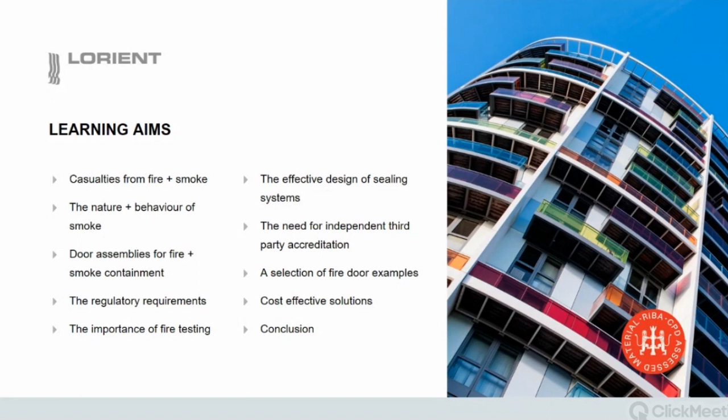So today we are going to look at the casualties from fire and smoke, the nature and behaviour of smoke, door assemblies for fire and smoke containment, the regulations, the importance of fire testing and the effective design of sealing systems, the need for independent accreditation, looking at a few fire door examples, some cost-effective solutions before reaching the right conclusion. So starting off with the statistics.

It's got to function as a normal door in everyday life, but then when a fire breaks out, it's got to be the effective barrier to prevent the spread of it. Now, we've got to be able to evacuate a building safely, and that might be horizontally or vertically. And fire and rescue have got to be able to come into the building because there may be some occupants left inside. And that fire resistance is always defined in minutes, 30, 60, 90 or 120 minutes for a timber fire door. And if we're looking at something like 4 hours, then we will be moving to a metal door.

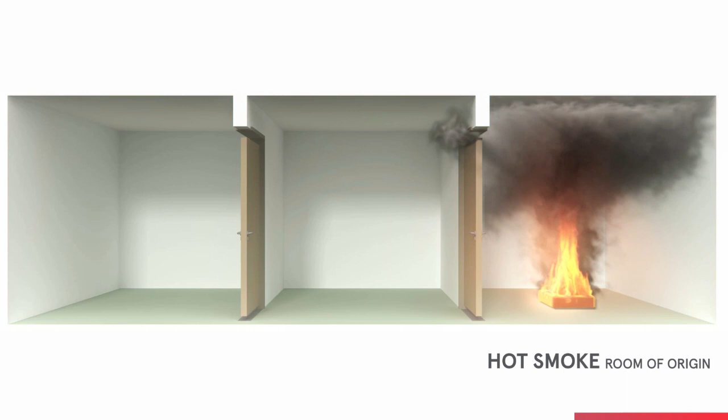And so what we want to do is limit the size and the spread of that fire to the room of origin. We do not want it travelling out of that compartment. Now, when you've got that combustion process taking place in that room of origin, the pressure is absolutely phenomenal. That smoke is going to be forced to the ceiling, and then it's going to spread sideways. It's going to travel through the head of the door and it's going to travel down a corridor. Now, generally, that smoke will always outrun the fire. As it then travels away from the seat of the fire, it will begin to lose its buoyancy and it will then drop and it will creep and it will travel through the smallest of gaps, particularly the threshold.

The smoke temperature in the room of origin is going to be 600 degrees C and the temperature in the fire compartment is going to be 25 degrees C. Now, we classify it as cold smoke, but it's highly toxic and it will burn your skin. And the reason for the statistics that we looked at earlier is because of this lethal gas called carbon monoxide. We cannot see it, smell it, or taste it. Now, we need oxygen to breathe in our normal atmosphere, and when that drops to levels as low as 14%, and we introduce just 1% of carbon monoxide, it could lead to disorientation in 20 seconds, unconscious in 60 seconds, with death then soon after.

Now, everything does depend on the size and degree of ventilation in the room that this takes place. But people think that you are going to wake up because of the irritation of smoke. However, this gas, carbon monoxide, is absorbed through your skin, taken by the blood straight to the brain. And that is why you become giddy and fall over. And it's also why the smoke knocks you out and then the fire cooks you. Now, I know that this is a very sobering thought and it's not a good message to deliver at any time of the day, but that is why we've got to talk about fire doors and their purpose.

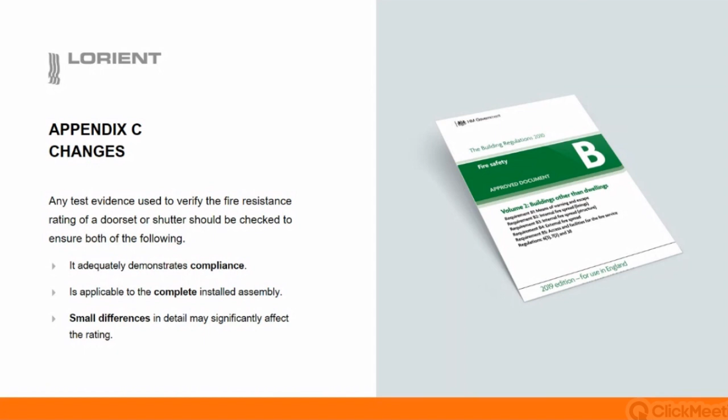It's a very complex system. Fire doors are tested and literally burnt to destruction to prove that they work. So we've got to make sure that everything is as tested. Now, Regulation 38 is the link between the approved document B and the Regulatory Reform Fire Safety Order.

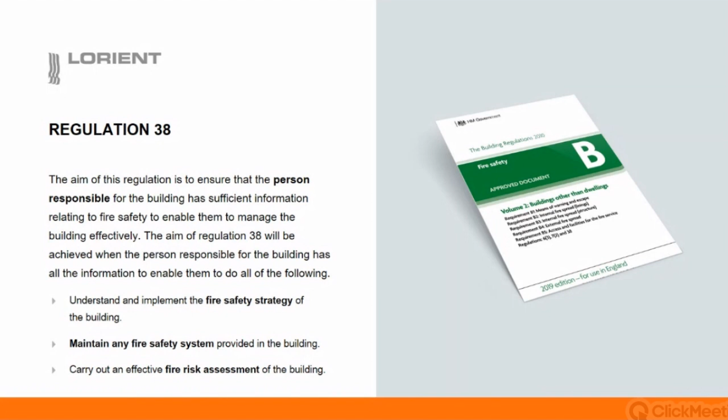And this very clearly states that the fire safety information must be given to the responsible person, either when the project is completed or when the building becomes occupied. And this is so that that person defined as the person responsible has got the information to be able to implement the fire safety strategy of that building, maintain any fire safety system in it, and carry out a fire risk assessment. I know that I'm talking about a lot of regulations, but all of these are key because we're dealing with a life-saving product.

Regulation 7 says that building work carried out with adequate proper materials must be appropriate for the circumstances in which they're used. So this is relying on the fact that somebody is going to purchase and install, if the components are being bought separately together to make the fire door, are doing it correctly, that they have the knowledge of what they're doing.

And so the Regulatory Reform Fire Safety Order actually collated, deleted and amended over 118 pieces of different legislation. Although this is dated 2005, it actually became effective in 2006. The government at the time said that the introduction would not become a consultant's charter or place an undue burden on businesses. And the Regulatory Reform Fire Safety Order applies to any workplace, common areas within apartment blocks, but does not affect domestic premises. So it does not affect our domestic house, but it affects all different kinds of public buildings outside our domestic house. So even, for example, places that you might not consider, like a church.

And so moving on directly to the Regulatory Reform Fire Safety Order, it demands that fire precautions are put in place that are reasonable and practicable, and they are to protect relevant persons. And so relevant persons, they could be the people that work within the building, they could be the visitors. It affects everybody that comes into that building.

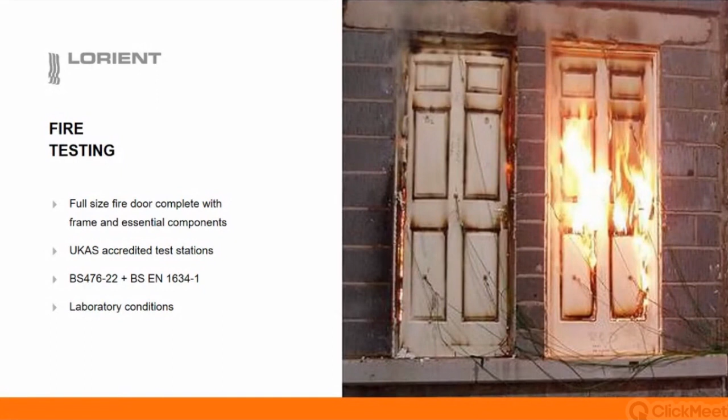Now I'm going to show you how quickly things can go wrong if somebody forgets to give their door and vision panel some intumescent seals. This is a very short video.

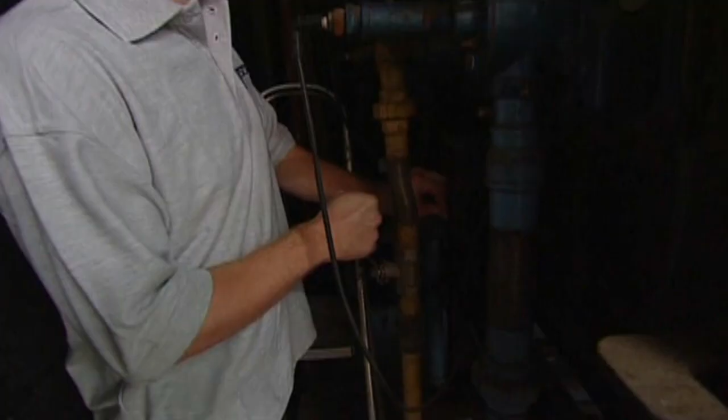We're going to show you a test sequence made by BBC South West for Inside Out after the tragic hotel fire at Penhallow in Cornwall. Samantha Smith is the presenter. This test shows how getting fire safety wrong can be catastrophic. The door on the right is correctly fitted with flame and smoke seals around the frame and window. The one on the left, identical in every other way, has no seals. A fire door should hold back a blaze for half an hour. Alan, must be about 13 minutes in now. The door on the right is intact. The door on the left is starting to burn through. Yes, what you have to remember is that these are both fire doors. Only the door on the right has fire seals and smoke seals. Look, it's actually going now. Look at that. And that's a new door. Many of the ones that we've looked at in hotels are old doors. They don't fit very well. They're damaged. They've not been maintained. And if a new door will fail in 15 minutes, an old door will probably go a lot quicker than that. So if we were in a hotel right now, the fire would have breached through that door, be travelling along the next corridor into the next compartment of the hotel. If the right-hand door was fitted, we'd be safe. Yes, you would be, yes. That's a graphic example of the value of properly specified and fitted fire doors. It was 25 minutes after the first door failed that the sealed door finally gave way.

And that is what the fire door manufacturers and the component manufacturers want. Safety is defined in minutes, and nobody just wants to get over the line of 30 minutes, 10 seconds. Everybody wants extra minutes. Safety is defined always in minutes when we're dealing with fire doors. Now, I would like to just very quickly show you the locations of intumescent seals, because this is the material, as you saw from my short video just now, that makes the fire door work.

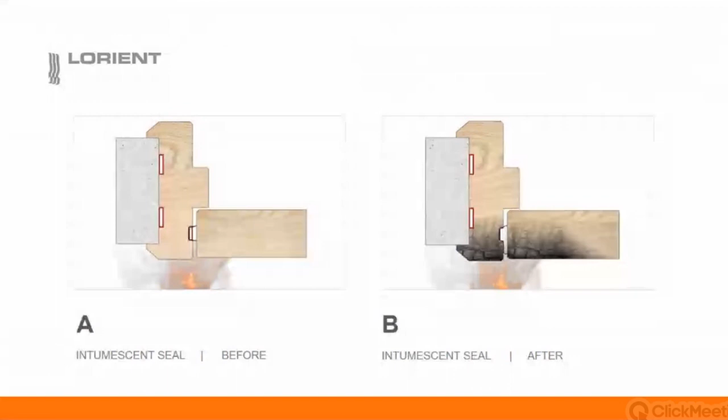Now, I'm showing it in the image A with fins, and whether that's a fin or a brush, that then means that we've got cold smoke protection, and that fin or that brush must touch the opposing leaf. So if it's positioned as it's seen here in the frame, that fin or brush has got to touch the door edge. And equally, if it's in the leaf, it has got to touch the edge of the door frame. And the tolerances of this are very fine. The tested gap for a fire door on the two long edges and the head of the door is 2 to 4 mil.

And when we're dealing with a combined fire and smoke seal, and we know that smoke is the killer, that gap is 3 mil, and we're given a 1 mil tolerance, so it becomes 3 to 4 mil to allow that door to open and close. Because we've got to remember friction. We've got to remember that people have to get through these doors.

But intumescent seals, which sometimes get called intermittent, but I promise you they're intumescent, are seals which contain different materials. The material that you can see here on the screen, the white material, is called sodium silicate. It's a chemical formula and it expands every single time at 120 degrees C. But the material that's most common is what we call graphite. It's a grey material and it's got a different formulation from different manufacturers, and that can expand at anything from 170 to 300 degrees C.

And what we cannot do in the perimeter of the fire door is mix and match sodium silicate with graphite seals. Now they can go in different locations, but on the two long edges and the head of the door or on the meeting stiles of pairs, we cannot mix and match the materials or the brand. And the reason for that is that if it's mixed and matched, the first thing that happens is you invalidate the test evidence of the fire door manufacturer. Now, he may have test evidence with both materials, but they were never mixed in the perimeter of the fire door when it went into the furnace and undertook the fire test.

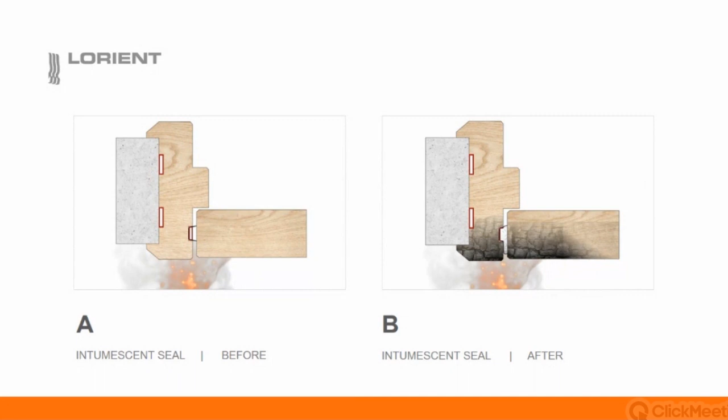And as I say, the size and location of those seals is always determined by the test evidence of the door manufacturer. And when the door manufacturers go to test, they test their doors as singles and pairs, single acting, double acting. And what we cannot do is ever make two single leaves into a double leaf. If we want a pair of doors, whether they're single swing or double swing, they have got to have been tested as a pair.

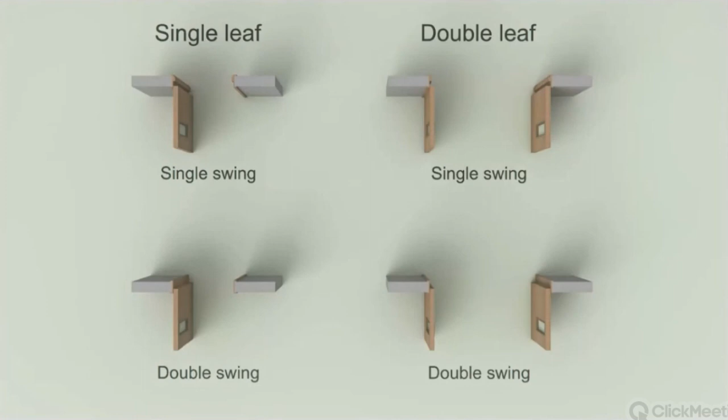We cannot simply, if we're not taking in a door set, go to a door store, whether that's builders merchants and places in the country. I shouldn't name anybody. But what we can't do is go out and buy off the shelf and make two singles into a pair of doors. Well, all doors are hard to get through, but pairs of doors are really, really difficult. So many things can happen.

And so how do we actually recognise a fire door? Well, the third-party accredited schemes that I'm going to show you now have been around for about 25 years now. You may have doors in buildings that are older than this that may or may not have any markings, but this is the common way to mark and identify fire doors now. If the doors have come through the BM Trada scheme, then they will have a plug. Now, these plugs are quite small, the end of a pencil. They tend to get positioned in a fire door on the hinge side of the door, generally between the middle and top hinge, so they are visible when the door is open.

They're coloured plugs with inner coloured fir trees, and across those fir trees, you will find a Q number. That Q number identifies the original manufacturer of that door or door set. The inner colour fir tree determines how that door left that door manufacturer.

The alternative way, or a very common way of recognising fire doors, are doors that have come through the BWF Certifire scheme. Now, they have a label that sits on the head of the door, and it very clearly tells us that it's an FD30 or 60, for example. It could be a 90 or 120 minutes, by the way. It has a Certifire number. So the CF996 that you can see on the screen is the individual test evidence applicable to that particular, for example, FD30. It clearly tells you who the door manufacturer is and how you can contact them.

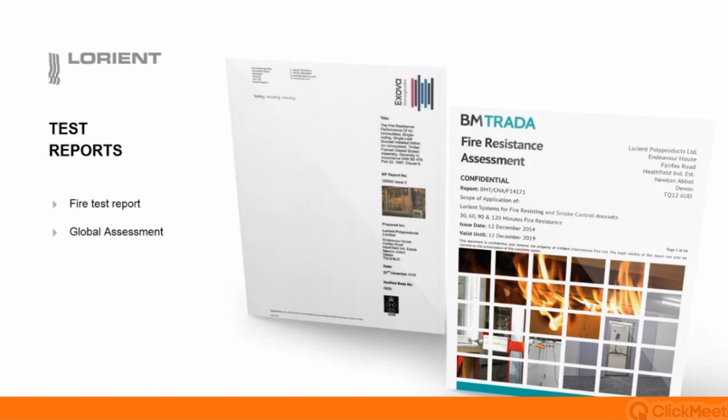And so you may have a test report that you're referring to, or you may have a global assessment, or you might have a Certifire certificate, but the detail will be in the paperwork trail. And if we go back to the beginning, ADB says that this kind of information must be handed over to ensure that the responsible person can carry out that risk assessment. It's also essential for anybody installing the door, inspecting the door, and critically maintaining it.

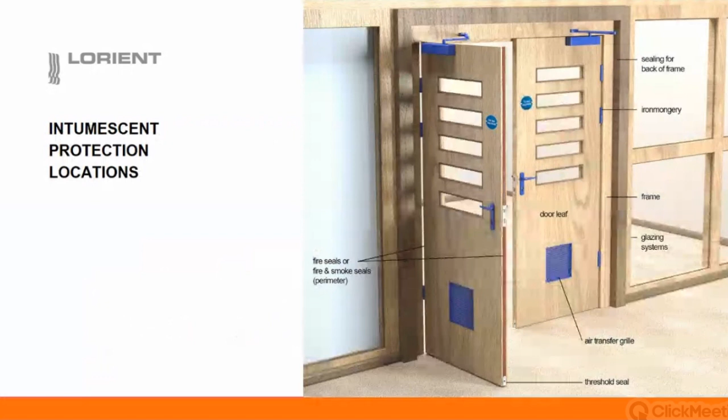Now, before I move on and show you some examples of issues at fire doors, I'd just like to point out the areas that we might be inspecting and maintaining. And so what we have here is an example of a pair of doors. They're single acting and we've got a screen. And so what we're looking at came in as a door set. Then the elements I'm going to tell you about should be fitted. If we're dealing with an assembly that has come into a building, then you just need to be mindful that these are the things that you should be looking for.

And so dealing, for example, with vision panels and air transfer grills, those holes should only ever be put into a fire door either by the original door manufacturer or what we call a licensed converter. And that is somebody that's been trained by the door manufacturer to put in correctly and consistently the holes or the apertures for these products. And with a glazing system for an aperture, again, that has to be done by those two people. But when we're dealing with that air transfer grill, the hole can be cut by the licensed converter or the door manufacturer. But the air transfer grill that's sitting at the bottom of that door, the square block, can actually be fitted by a contractor on site.

When we're dealing now with ironmongery, hinges, concealed door closers, or locks or latches, because we've got two fire tests running parallel at the moment in the UK, 476 or 1634, those pieces of essential ironmongery might need additional intumescent protection. And so, for example, with the hinges, it might be that we need a material called monoammonium phosphate. It's a white material and it's a sheet material, and it will sit underneath each hinge blade. So that means it will be 1 mil of timber that needs to be taken out of either the leaf or the frame if we're reinstalling. This material doesn't expand, it actually insulates, and it therefore will not pop the size 8 screws out of the hinge blades. It simply makes sure that when the fire is attacking that door, it doesn't cause that door to fail or drop.

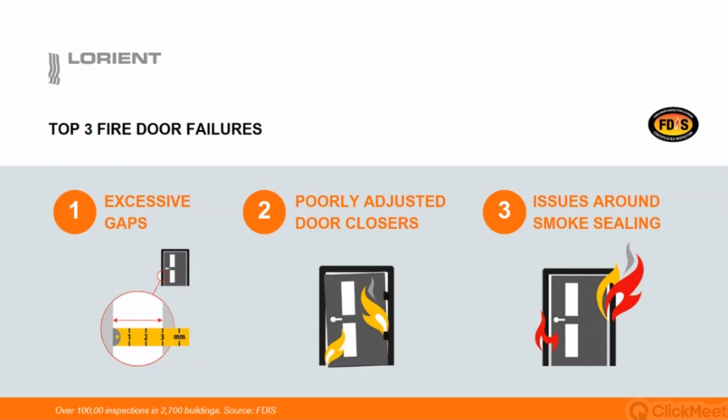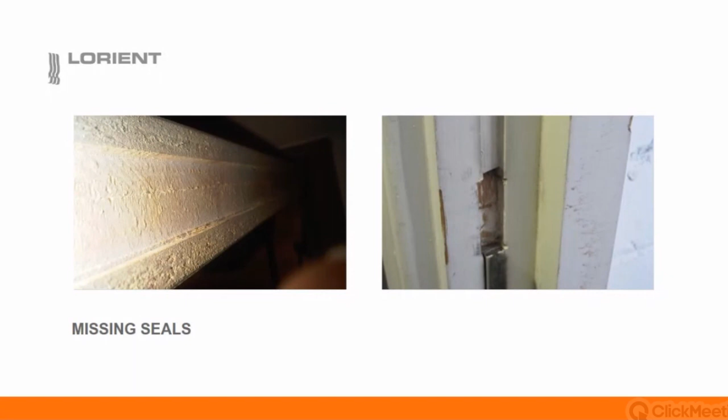And the seal, we need to peel out, check whose brand it is, and make sure that we put the right seal back. If we peeled that seal out and we didn't know who the manufacturer was, then we've got to take the entire perimeter of the seal out on the rest of the frame and the head and put a brand new one back in. And that again is where third-party accredited products work best.

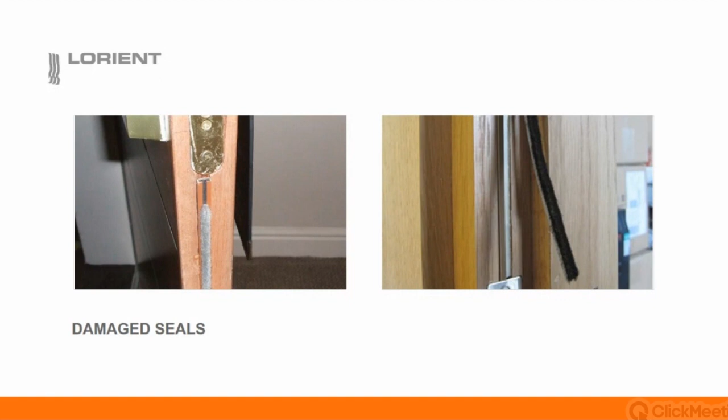Here we've got damaged seals. And so what we need to do here is peel them out and do exactly the same thing. If we cannot see the brand, we've got no test evidence to refer to, then we've got to choose another third-party accredited combined fire and smoke seal. And the seals, from a fire and smoke point of view, they could have fins, they could have brushes. Fins are kinder to allow the door to shut, but a brush is an excellent combined fire and smoke seal.

Here we have got a grey combined fire and smoke seal brush that has been painted. And I need to highlight the fact that if you have got a painted brush or a painted fin, that will not give you the combined fire and smoke performance, but it's the smoke performance that's negated. The intumescent seal will still work, and so we have a choice here. We could leave that seal there and give it an independent, third-party accredited smoke seal. However, it may be better to peel that seal out and replace it, but you have to be mindful when you do that, you've got to make sure that the intumescent seal fits completely flush into that old-fashioned slot.

And a solution for an independent third-party accredited smoke seal could be something like Batwing. Batwing sits in the corner of the door stop, as you can see in the image on the right. The door only comes into contact when it's in the shut position, and it gives you smoke and sound protection. However, there is no fire capability. And so that is why when that is fitted in a door that has no existing intumescent seal, it will always need a separate fire seal for that designed capability.

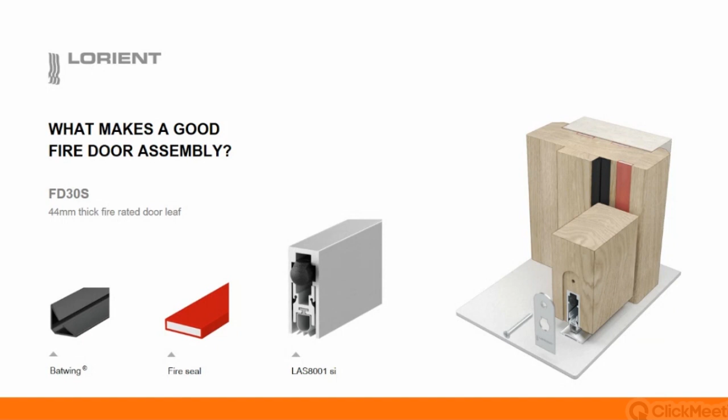I also need to reference a plain fire seal. If a plain fire seal is painted, the intumescent seal will still work, but please don't paint over them when they are brand new.

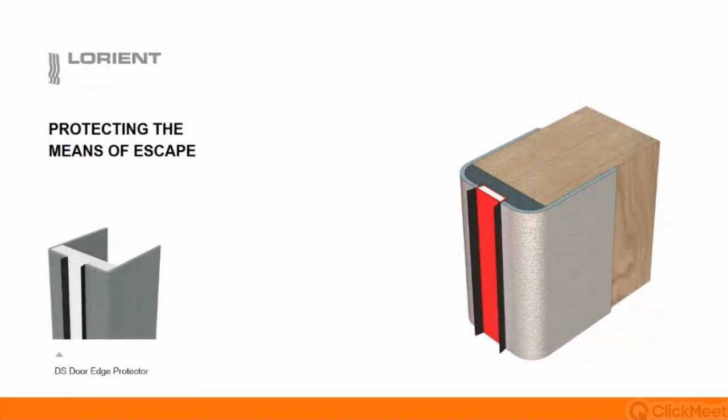This is fitted on the door edge, and the fixing is actually disguised underneath the intumescent seal. When it's fixed to the door, it comes in 44mm or 54mm thick width, and it comes in different lengths, so it'll suit alternative heights than a standard leaf. However, when that intumescent seal is then fitted, it disguises the fixings.

Now, glazing, we've already touched on the fact that glazing should only be done by licensed converters and the original door manufacturer. However, if somebody puts their fist through a vision panel and we need to make an emergency repair, then obviously we have to do that because we may have sleeping people in those buildings. If you're going to carry out this kind of repair, please make sure that you actually have that door back in situ before you leave.

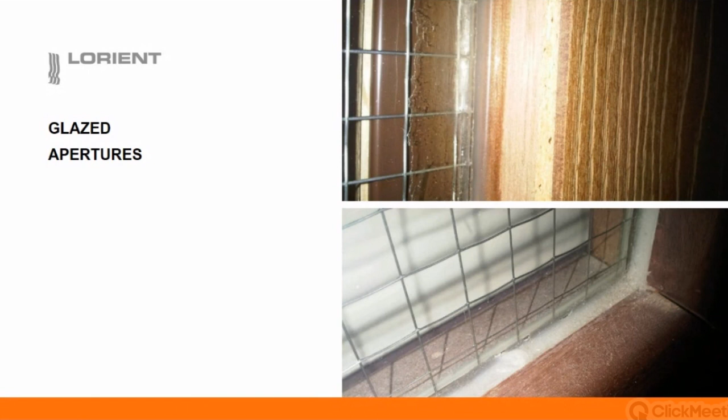So you can see in the top image that the Georgian wire glass was replaced and it's been put in. It looks like it's got some kind of silicone sealant to actually hold the glass into place. Now that is not a tested solution, and the bead detail hasn't been put back. So that really is a very, very bad repair. And we've got something similar going on in the image at the bottom.

Now, here are two possible choices. And again, we're constantly having to refer back to test evidence, but two different glazing systems here. The one on the left is a graphite, and this is a 2-seal system. So we've got Georgian wire glass, and we need then the seal either side of it. We've got to obviously make sure then that when this repair is being done, the correct glazing system is used, the correct bead detail is used, and the correct fixings are used.

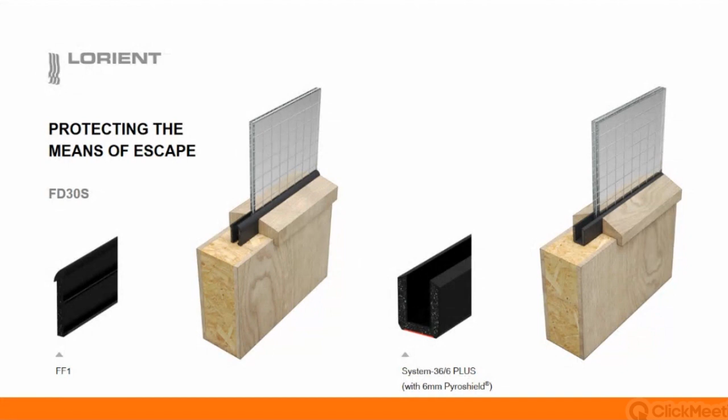There is absolutely no point going out and getting the glass and the seal if the tested detail of that bead is not followed. So please make sure that you follow the test evidence of the seal manufacturer. The one on the right, as you can see, is also a graphite material, but this is actually a channel. But again, the test detail is, how does that bead get fixed? What is the size and the degree of the chamfer? Please make sure that you follow the test evidence.

Other reasons for potentially having holes in doors might be something like a letter plate. Two different letter plates here. They were actually flat entrance doors, and under the RRO, somebody recognised that they were not a fire and smoke solution in that fire door, so they were not going to protect the occupants if there was a fire or anybody fleeing down the corridor to escape a fire.

And having heard that graphite works, you can see that with the top aperture, somebody went out and bought some graphite and lined it. Now that is not a tested solution. In the event of a fire, the flap that's being held up is going to melt, and that graphite will not swell enough to fill that hole. It is not a tested solution.

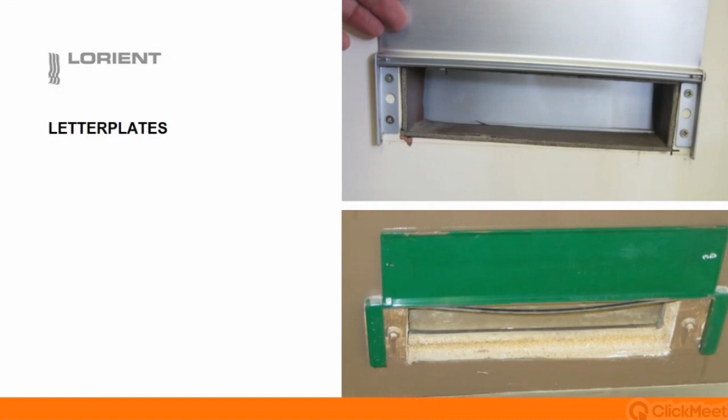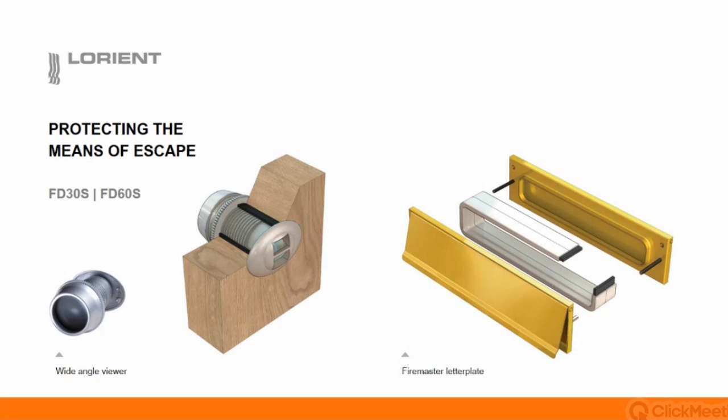And so a tested solution could be, for example, the letter plate here that is shown on the right. Because I'm not in front of you, I can't actually show you this, but it's actually a telescopic plate, and that white element is the graphite wrap. And what happens in the event of a fire, that graphite wrap completely crushes the PVC sleeve that goes in between the two elements. And so in the event of a fire, you will have a flat and a safe compartment and the safe means of escape.

I don't know what it was or whose it was. They took the cover grill off, took the block out, and then forgot to go back and replace it. And so again, that will simply not work.

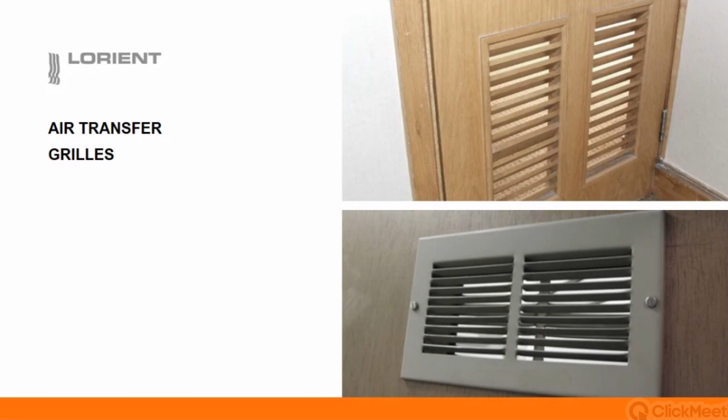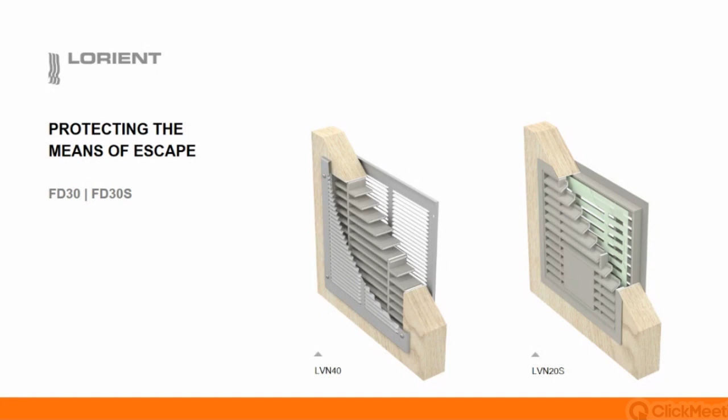And so with regard to air transfer grilles, the image here that we have as a solution, the image on the left, the LVN40, that is a fire-only system. So in the event of a fire, that will allow smoke to travel straight through it. So that can only go into a fire door.

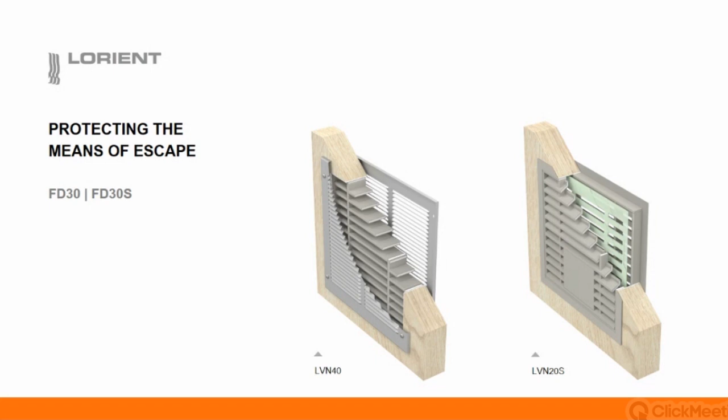If we need to put an air transfer grille into a fire and smoke door, we're inspecting them and we need fresh air from one side of the door to the other, then we have got to fit a system like the one on the right.

Now that is a system that's electromechanical. It's got 2 intumescent blocks, so that will give you the fire capability. And the shutter in the middle becomes the smoke shutter, so that will give you a protected escape route. It needs power, but power is taken to the door either through a conductor hinge or through a powered armoured cable.